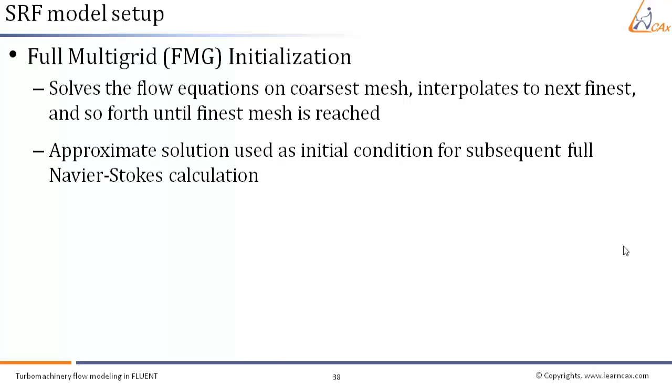There are several benefits of this approach. It is convenient for the user. No separate solution is required. Any solver can be used, that is segregated, coupled, implicit, or explicit. It permits a very large Courant number as well for a coupled implicit solver. So it is a very good way to actually initialize your solution in case of turbomachinery flow problems.

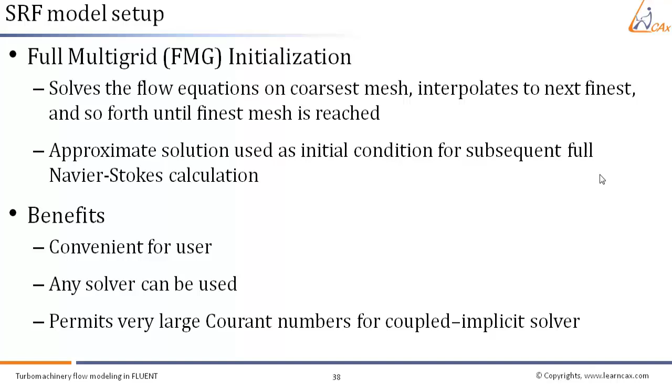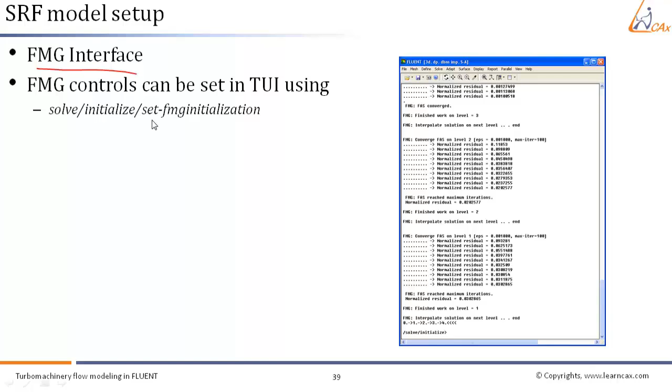For doing FMG initialization, we have to go to the FMG interface in the text user interface. You have to type solve initialize set FMG initialization in the text user interface or the command line. This permits setting of convergence tolerance as well as maximum number of iterations on each coarse grid. All these settings can also be done using the text user interface commands.

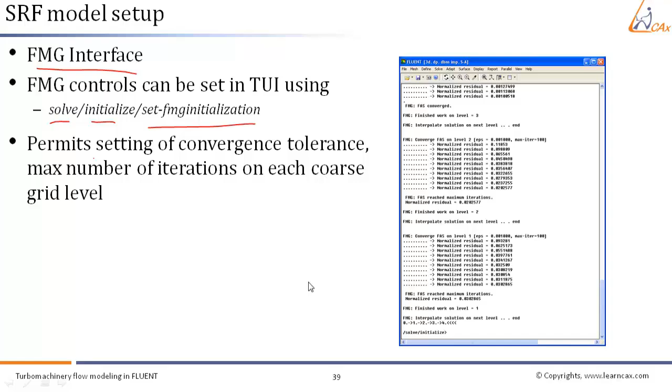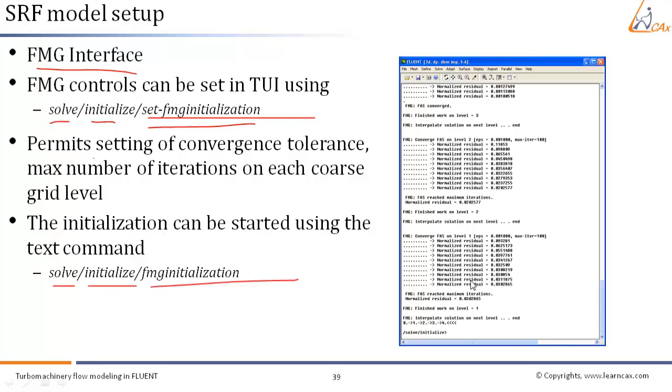Using the set FMG initialization, you can set all these parameters and how to actually initialize the domain. You have to give the command solve initialize FMG initialization, and after that you continue to solve your problem as normal by pressing calculate.

There are some recommended strategies or techniques in order to obtain better accuracy as well as good convergence in case of the single reference frame model. There needs to be a higher degree of coupling between the momentum equations when the influence of the rotational terms is large. A higher degree of rotation introduces large radial pressure gradients which drive the flow in the axial and radial direction. So this gives rise to redistribution of the swirl or rotation in the field.

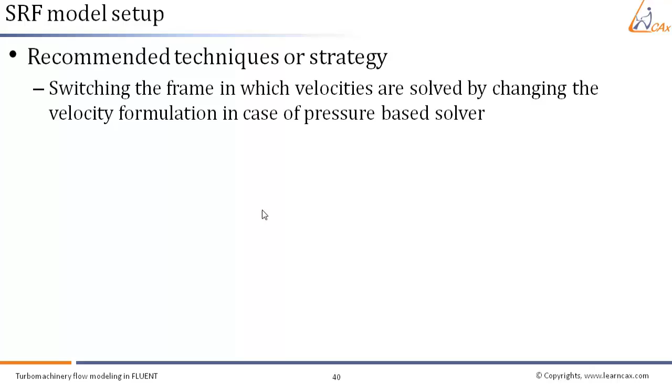This coupling may lead to instabilities in the solution process and hence require special solution techniques to obtain a converged solution or a better or quicker solution. The first recommended technique is to consider switching the frame in which velocities are solved by changing the velocity formulation in case of the pressure based solver.

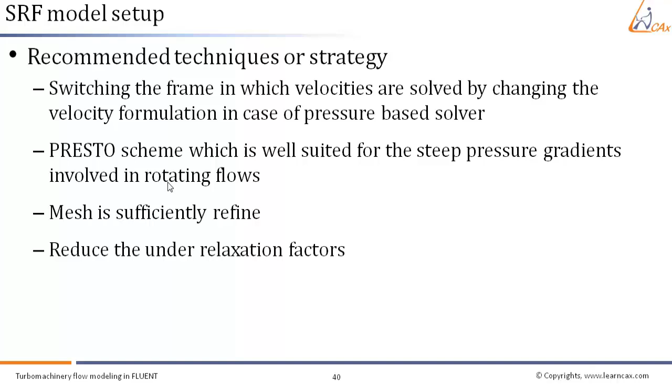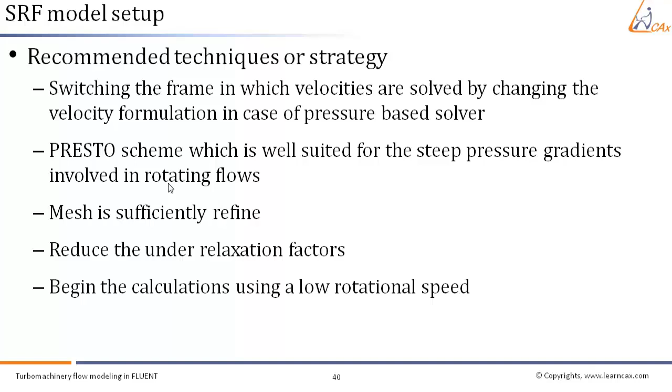We can use the PRESTO scheme, which is well suited for steep pressure gradients involved in rotating flows. We can ensure that the mesh is sufficiently refined to resolve large gradients in pressure and swirl velocity. We can reduce the under-relaxation factors for velocities and keep them around 0.3 or 0.5, or even lower if necessary. We can begin the calculations using a low rotational speed and then gradually increase it to reach the final desired operating conditions. These are the strategies to get better convergence and accurate results.

There are also some recommended strategies to avoid instability. We can gradually increase the rotational speed to improve solution stability. Because of rotation of the reference frame, the rotation defined via the boundary condition can lead to large Coriolis forces in the flow. Due to this, the Fluent calculations may be less stable as the speed of rotation, and hence the magnitude of these forces, increases. One of the most effective methods to control this is to start the simulation with a low rotational speed and then slowly increase it up to the desired level. Let us discuss how to do this.

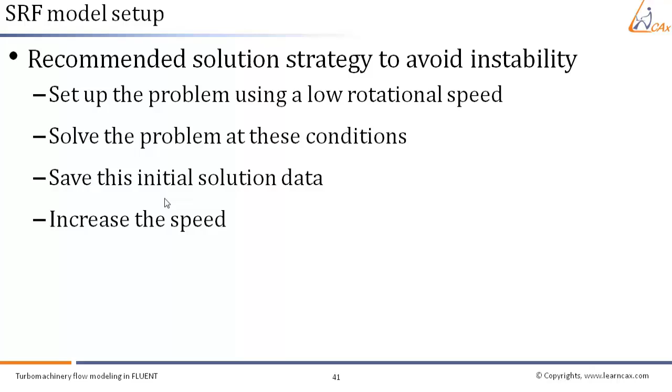First, set up the problem using low rotational speed in the inputs for the boundary conditions and the rotational velocity of the reference frame. The rotation speed in the first attempt might be selected as 10% of the actual rotating speed. Next, solve the problem at these conditions. Save the initial solution data. Modify the inputs, that is increase the reference frame speed by some amount, perhaps double it. Restart or continue the calculation using the saved solution data as the initial guess for the new calculations.

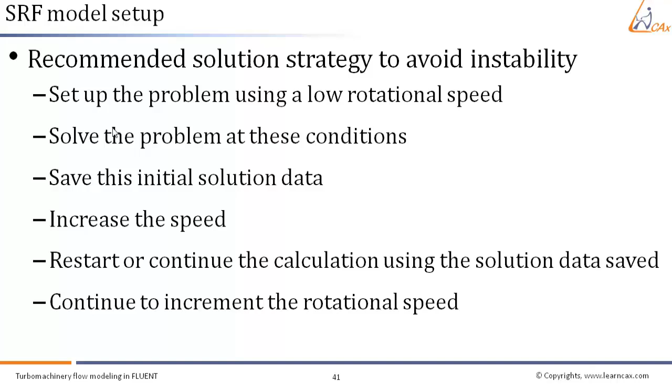Again, save the data and continue to increment and restart the solution using the previous solution as the initialization, slowly ramping up the velocity until you attain the actual desired rotational speed. So this is the way of gradually increasing the rotation speed in order to avoid instability in rotating flow modeling by moving reference frame.

Now let us discuss the result types that you can plot when you are modeling a single reference frame, and some of the important factors. When you solve a problem in a moving reference frame, you can plot or report both the absolute and relative velocities. For all velocity parameters, corresponding relative values will be available for results. These are available in the velocity category.

When plotting velocity vectors, you can choose to plot vectors in the absolute frame, or you can select relative vectors. If you plot the relative velocity vectors, you might want to color them by relative velocity, as by default they will be colored by absolute velocity. So the coloring can be a bit misleading. Be careful with plotting vectors, understand which type you are plotting, which velocity formulation you are using, and how to make sense of the results. You should get it by gradual practice of some of the rotating flow modeling tutorials.

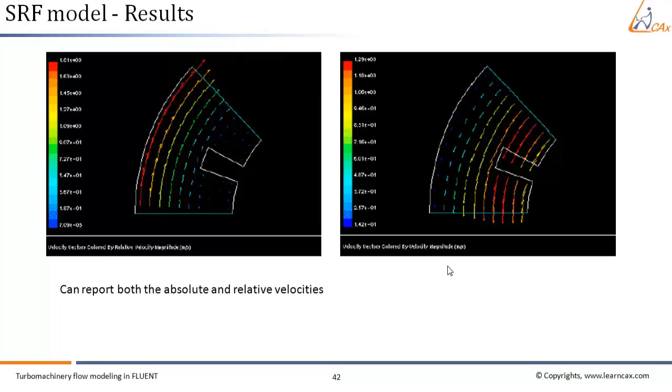So to summarize this session, we have seen what the SRF model in Fluent is and understood the concepts behind it. We also studied how to set up the SRF model in Fluent and the different solution steps. In the next session, we will see what the MRF model is and how to analyze a rotating flow problem using the MRF model.